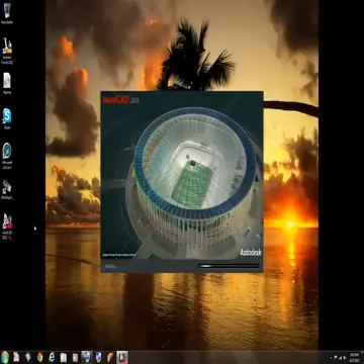Everyone opens up AutoCAD most likely by double clicking the icon on the desktop, or you can go to all programs. In this case we'll double click it, and while it's opening, let's talk about what is AutoCAD. AutoCAD refers to computer aided design and drafting. It's the process of using a computer with CAD software to design and produce drawings and models according to specific industry standards. So whenever we talk about AutoCAD, we're referring to this software.

Whenever you open AutoCAD for the first time, by default you receive a welcome screen. This welcome screen can be turned off by unchecking the display at startup box. In my case, I'll leave it there.

The welcome screen is divided into three columns. The first one is the work column, which has several options: new, open, and open sample files. If any previous work has been done in AutoCAD, different file names should appear here.

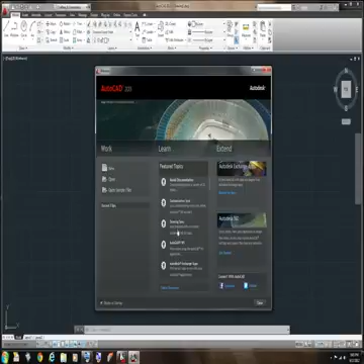We also have another column, Learn and Extend. Both of these refer to Autodesk online help. So if you need model documentation, customization, or to see drawings of AutoCAD and so on, you should click here and be connected to the internet.

Close it and let's go directly to the default screen that comes up in AutoCAD. Here you have a different set of options. This is your interface for AutoCAD, called the model space.

Technically, this black screen, the model space, is infinite in AutoCAD, so you can draw the entire world here. But our advice is you should always draw at actual scale. If you're drawing for a construction company, like a house, using inches and feet, you should draw at 6 feet 6 inches and so on. If you're drawing for a mechanical or aerospace company in millimeters, you should draw at that scale. So in AutoCAD you always draw at actual scale.

Let's show you the different features of AutoCAD and how you interact with them. At the left top corner we have the application menu button. Whenever you click here, you get a window with commands or actions common to any Windows program.

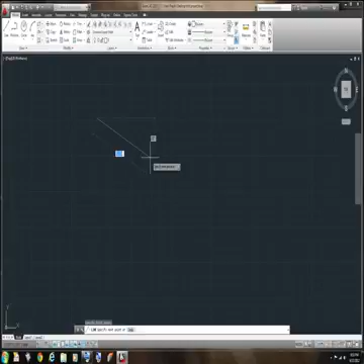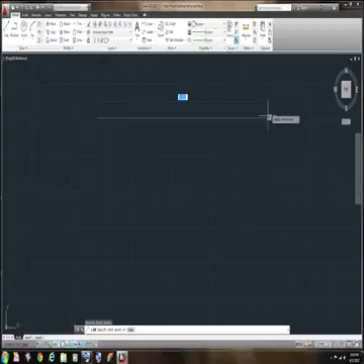So you click, this is my first point, and it will tell you to specify next point. You can see the same information in the crosshair and also read it down here: line, specify next point, or undo. Whenever you go outside the model screen, the crosshair turns into the regular pointer or mouse. Whenever you go back in, it becomes the regular crosshair again.

So let's say this is our second point, and now AutoCAD asks what you want to do next: specify next point or finish. If you right click, or hit enter on your keyboard, it will end the line. So now you have a line.

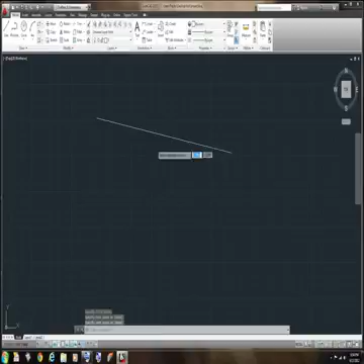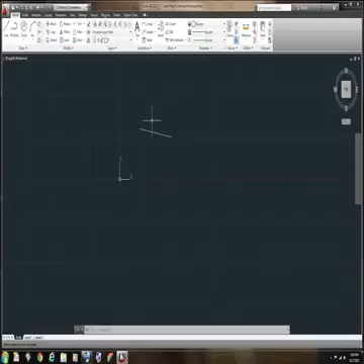Let's hit escape to unselect, and as I mentioned before, this model space is infinite. You scroll, zoom in or zoom out with your mouse. Let's erase this little line. You can select it and delete it with your keyboard, or select it, right click, and erase it. Let's undo so you can see there are different ways in AutoCAD to do the same thing. When you select it and right click, it gives you a set of options: erase, move, copy, whatever you want to do with that thing. In our case, we want to erase it, and it's done.

A very important thing is here down, you have what is called the command line. This command line is a means for AutoCAD to communicate to you.

You can type. Let's try the same thing without going ahead and clicking the line command. I'm going to use my L on the keyboard. As you can see, AutoCAD now is giving me a set of options by default, and this is new for AutoCAD 2013. As you can see, I have here the L, and AutoCAD is giving me all that is related to L: L for line, LA for layer, large object support, LAS for layer state, and so on and so forth. So a set of options.

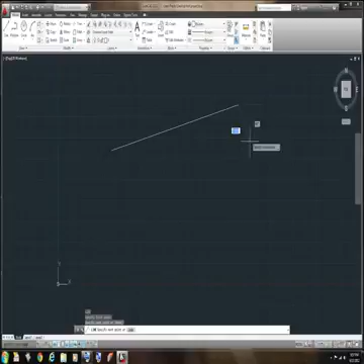In my case, I type L and hit enter, and the same command line applies. So you have several ways to do the same thing. You can go ahead and click line here, or you can type a shortcut, hit L, enter, and now it's the same thing. It's asking you, and you can look there at the command line, and it says 'specify next point.' We're doing the same thing. You right click after you complete your line, hit enter, and your line is done there.

So this is a very useful way, let's delete it, to communicate with AutoCAD through the command line, or you can go ahead and click the commands, the icons. There are literally tons of commands which are not in the ribbon, and this is the ribbon. So it's very useful for you to learn those commands, but it's going to be time for that later.

Okay, let's now talk about this thing here. You can see this XY coordinate system. This is called the UCS, which stands for User Coordinate System. Most likely you remember from school the X and Y axis. We're working here in two-dimensional, a two-dimensional system, in the X direction and the Y direction, and AutoCAD is based on that. So if you see, for example, 5,8, that means 5 units in the X direction, 8 units in the Y direction. Right now it's not that important, but whenever you're introduced to AutoCAD 3D modeling, then the Z axis appears and it's going to be a little bit more complicated, but for now we're okay.